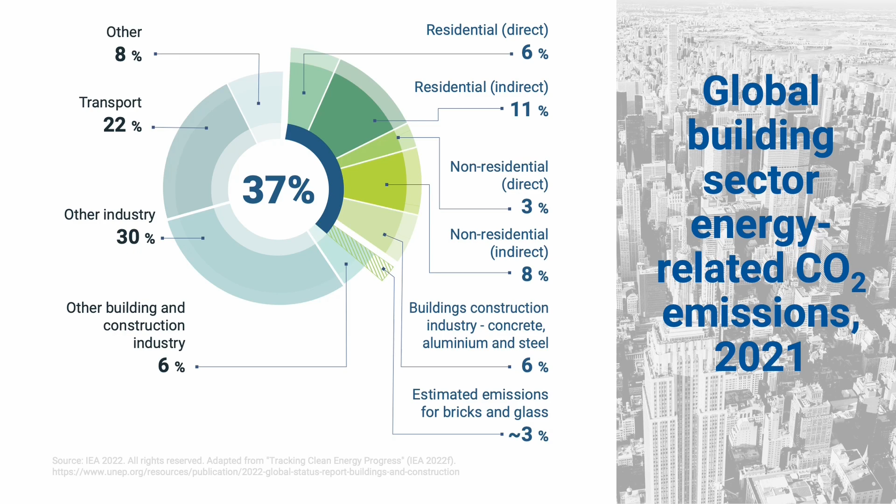Remember that in 2021, indirect emissions from buildings accounted for roughly 2/3 of total global building energy-related operational emissions. Most of those indirect emissions came from electricity generation. Low-carbon electricity sources are going to be essential to reduce indirect greenhouse gas emissions from the building sector.

Low-carbon electricity can come from nuclear or renewables such as hydropower, solar, wind, and geothermal. The contribution of each varies from country to country. Globally, 39% of our electricity came from low-carbon sources in 2020. But there's a lot of variation in the low-carbon electricity production worldwide.

World electricity generation has added roughly 3,700 terawatts of low-carbon electricity generation since 2010, increasing it by 54% in the past 11 years. China has accounted for roughly half of that global low-carbon electricity generation growth.

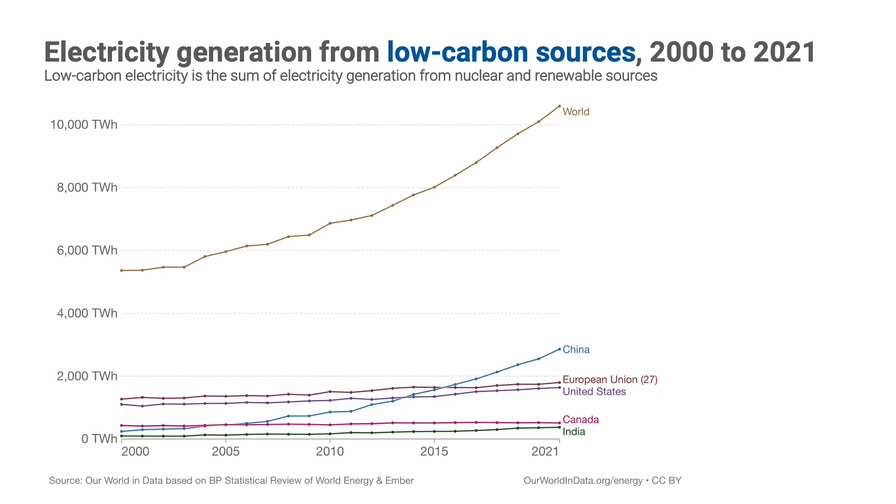We will need to figure out how to substantially reduce emissions from the world's reliance on electricity generation from coal. As we look for solutions, it's important to understand why we've relied on coal in the past. Coal has been a reliable and affordable energy source. It's abundant, and it's easy to extract and relatively inexpensive to transport.

Additionally, it is a very efficient fuel source, meaning that a large amount of energy can be produced from a small amount of coal. As we look to reduce greenhouse gas emissions, coal generation produces more than double the greenhouse gas emissions when compared to combined cycle natural gas generation.

World electricity generation added roughly 1,700 terawatts of coal electricity since 2010. Many countries have decreased their coal generation during this period. China's growing economy added roughly 2,100 terawatts of coal generation since 2010, slightly more than the amount of low-carbon generation they added during the same time frame.

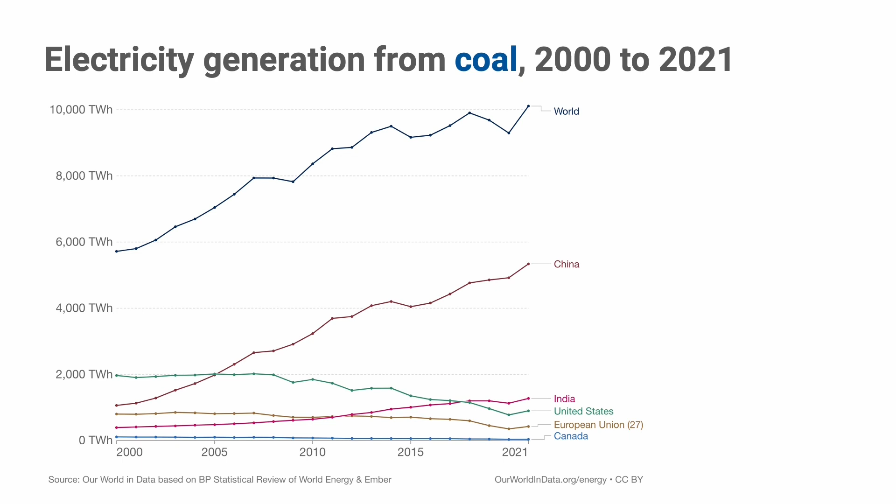Economics will continue to play a critical role in the overall solution sets as we transition towards low carbon generation. The energy around the globe must be accessible and affordable.

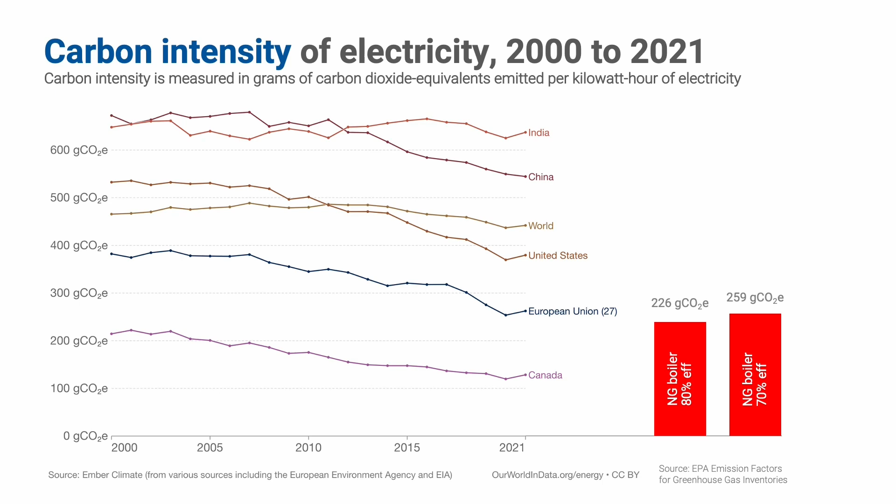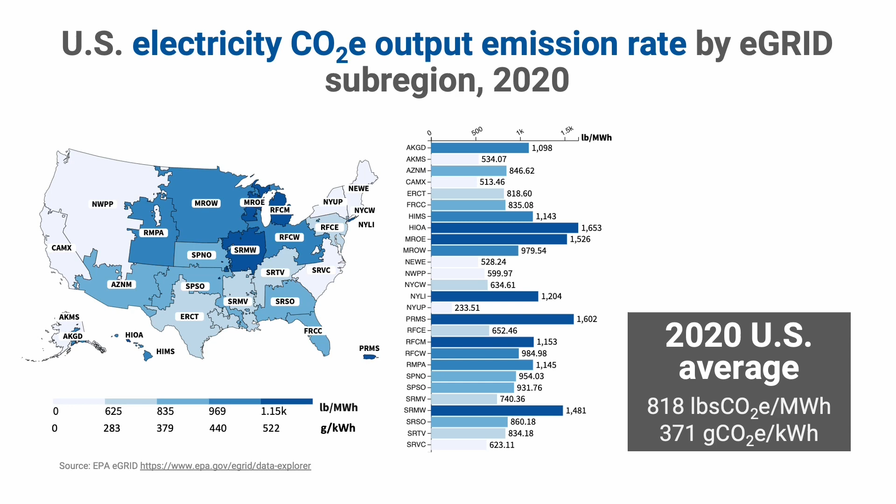For electrification to fully realize its carbon reduction potential, buildings need integrated sequences to coordinate supply and demand and shift energy use using thermal storage systems.

Let's now explore what may be required to achieve building decarbonization and net zero energy-related emissions by 2050 from a global perspective. The International Energy Agency Net Zero Emissions by 2050 scenario shows a global roadmap to get to NZE by 2050.

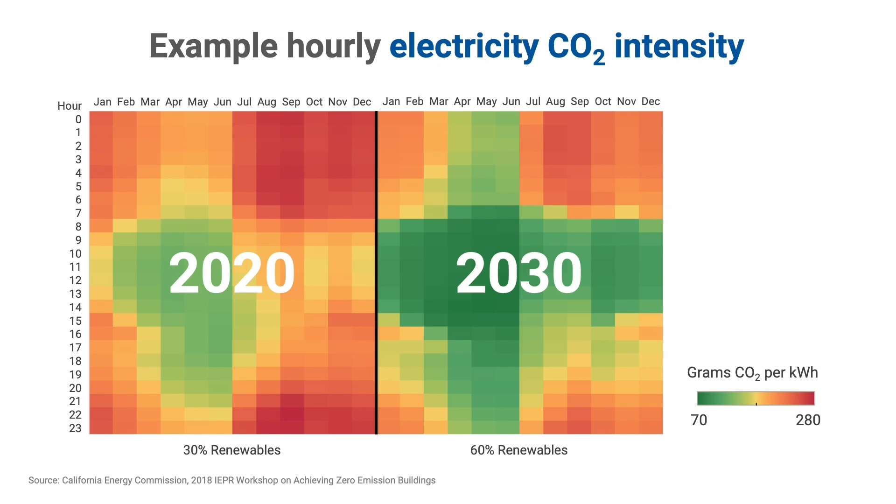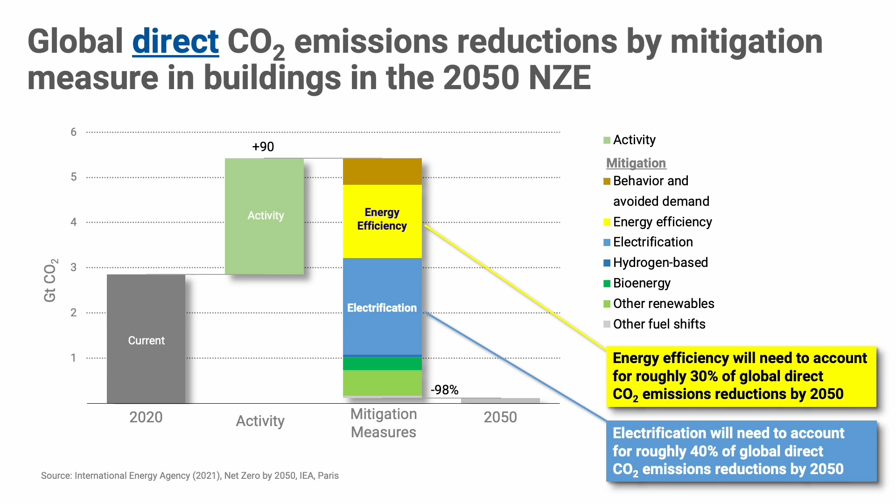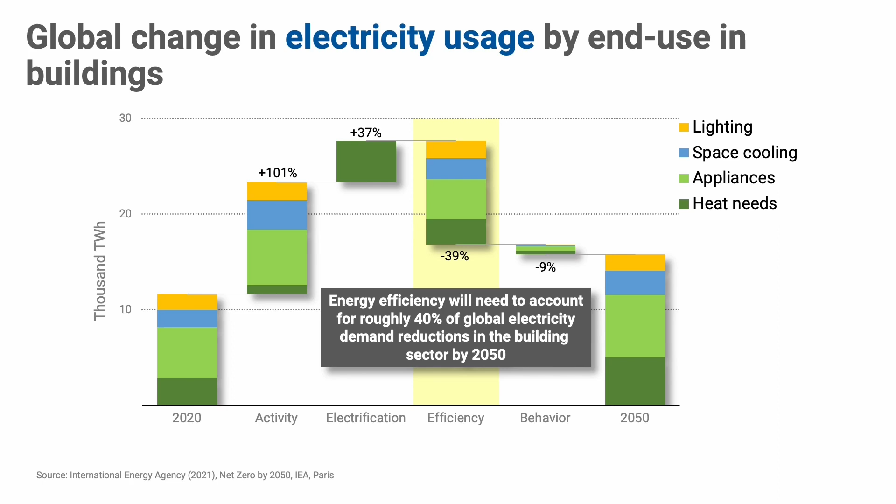Roughly 40% of electricity consumption in the building sector needs to be reduced with energy efficiency. The takeaway from the previous two slides is a substantial portion of global building sector operational energy carbon emissions reduction will need to come from energy efficiency.

What is more elegant than energy efficiency? A kilowatt hour saved is the cleanest and greenest. This is a win-win since it addresses both direct and indirect emissions and improves the economic viability of the investment.

The good news is many parts of these elegant solution sets for energy efficiency exist today. Energy efficient building envelopes, passive design strategies, heat recovery, heat pump technologies, energy storage, and efficient control strategies, to name a few.

Lately, there's been a lot of discussion around whole life carbon emissions based on the life cycle of a building. As discussed in Module 1, whole life carbon emissions include embodied and operational carbon.

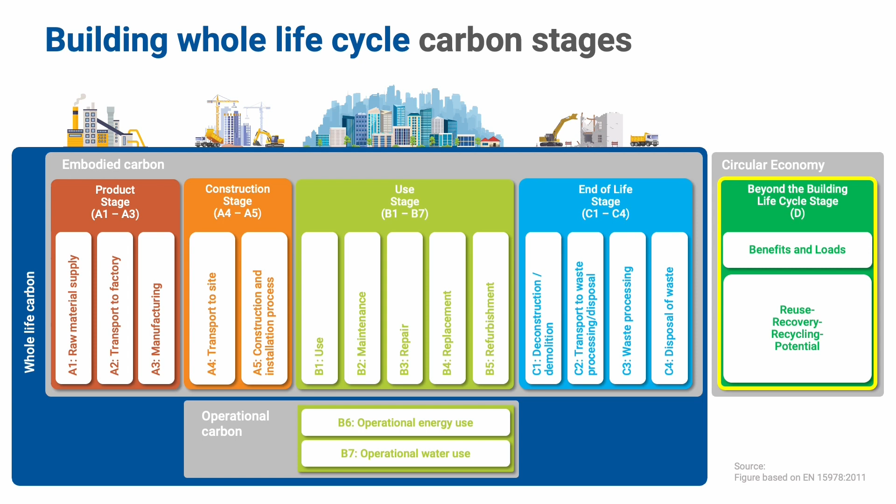Reducing both embodied and operational carbon in buildings is critical to achieving a more sustainable and low carbon future. Governments and other organizations are beginning to understand the importance of evaluating means to reduce embodied and operational emissions. Let's further explore embodied and operational carbon emissions over the first 30 years in the life of a building.

It is also assumed that an additional 100 kilograms of CO2 equivalent per square meter is used at year 15 for building renewal during the use stage.

The 2020 U.S. electric grid average emission rate of 371 grams per kilowatt hour was used as the initial grid emission rate. Linear regression was used with the annual lowering of the electric grid emissions. This assumes the grid achieves 90% decarbonization in 30 years.

The first scenario shows operational carbon for an EUI of 30 kBTUs per square foot per year, equivalent to 95 kilowatt hours per square meter per year. Embodied carbon accounts for roughly half of the total carbon emissions in the first 30 years of operation. The takeaway is embodied carbon can be significant.

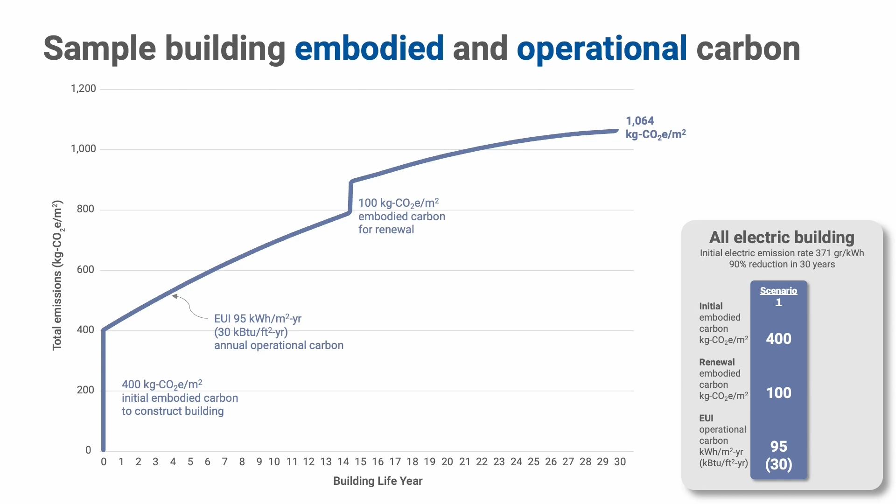Scenario 2 improves operational carbon with an EUI of 20 kBTUs per square foot per year, or 63 kilowatt hours per square meter per year. Since there are no-cost and low-cost ways of reducing embodied carbon by at least 25%, we've assumed the initial embodied carbon has been reduced to 300 kilograms of CO2 equivalent per square meter.

Scenario 2 achieves a 30% carbon emission reduction compared to Scenario 1 in 30 years. If only operational carbon were addressed, then that reduction would drop from 30% to 18%. The takeaway is that the building industry is moving towards considering whole life carbon impacts.

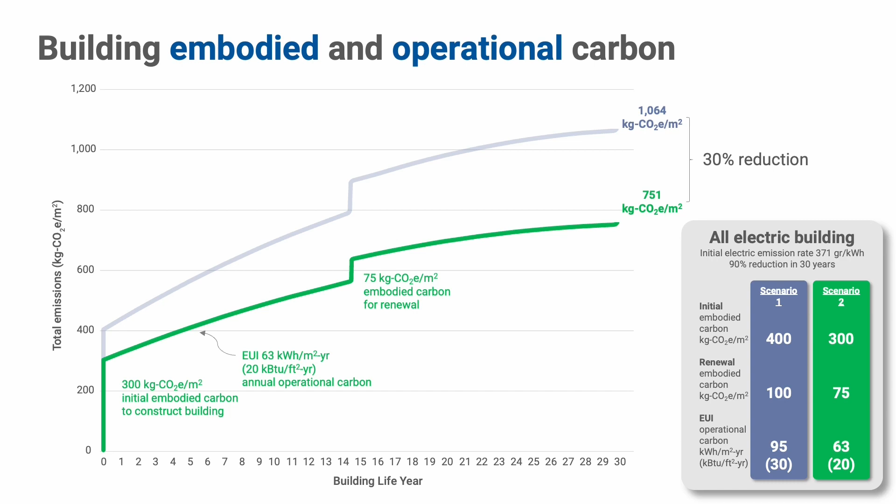The key takeaways from this module include: the building sector significantly impacts global greenhouse gas emissions from embodied, operational energy, and refrigerant emissions. As we look to electrification as an alternative to decarbonizing buildings, the electric grid carbon intensity will need to move towards net zero emissions by 2050 to recognize the true benefits. We also discussed that carbon intensity could vary by time of day, and buildings can be designed to interact better with the grid to minimize overall emissions.

Energy efficiency is the #1 strategy to reduce greenhouse gas emissions. The building industry should consider the whole life carbon impacts and not only focus on operational carbon emissions. And finally, embodied carbon does matter in both new and retrofit projects.